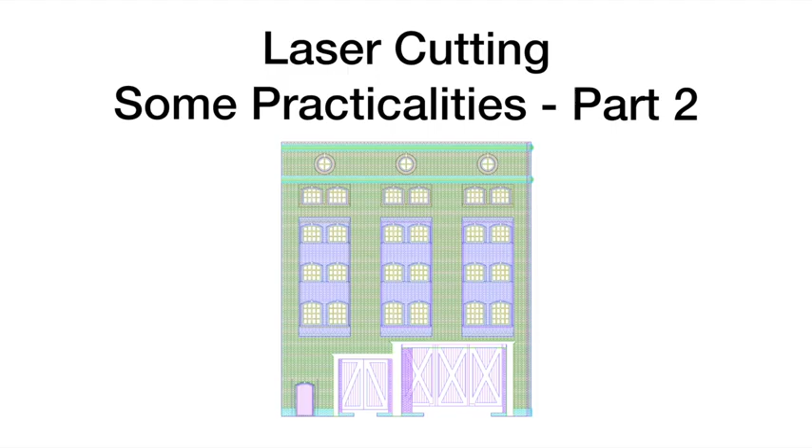Welcome to part 2 of this brief overview of some of the practicalities of designing for and using a laser cutter. We left part 1 having designed our particular object in carefully planned layers. We will now pull much of that apart as we get the object ready for the laser cutter.

We could, of course, simply show only the layers from a single sheet and export that to the laser cutter and cut it as it was drawn. But this would be enormously wasteful of material and, as we have seen, not an inexpensive material. But in addition, the layers we carefully plan for the design of the object are not necessarily suitable for the cutting process itself, as we shall see.

In practice, we'll tear up the drawing, well, actually copying and pasting to a new set of files. I can guarantee you'll need to go back to the original at some point, to create a file for each thickness we have used. Do this by showing only the layers pertinent to a particular sheet, hide the rest, then copy and paste this, including any etch layers, to the new drawing. Repeat for any other layers referring to sheets of a similar thickness.

At this stage, don't worry about the layout in the new drawing, just ensure they don't overlap. You lose nothing by having them well spaced out, and it makes the next step easier. You do not need to copy any construction or annotation layers. This does highlight one useful tip, which I'm sorry to say I don't always do, and that is to use the thickness of the material in the name of the layer. One thing I do always do, however, is include the thickness of the material in the file name. If you are cutting several sizes in one go, this can be very helpful.

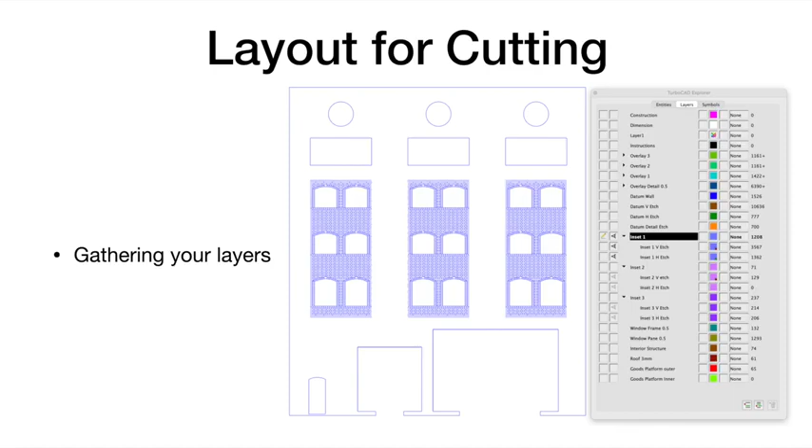The key dimension here is the maximum size of the laser bed. That is the maximum size sheet that the laser cutter can cut. Clearly, this is a restriction you have to work within, and its influence will vary depending upon the scale you are working in. The club laser I use has a bed approximately 450 by 350 millimeters, big enough for most things in 4mm, no problem in 2mm I would imagine, but you may need to make buildings in sections in 7mm.

Setting the size of the grid, as we saw earlier, to this size gives a very simple visual indication of how your design will fit on a sheet of material, and if you need more than one sheet. If your software does not allow setting the grid size, then add a rectangle on another layer and use that. Just remember to hide it before you export the drawing. There are, however, a number of other issues that you will need to consider in laying out the drawing for cutting. The first I'll look at is tabs.

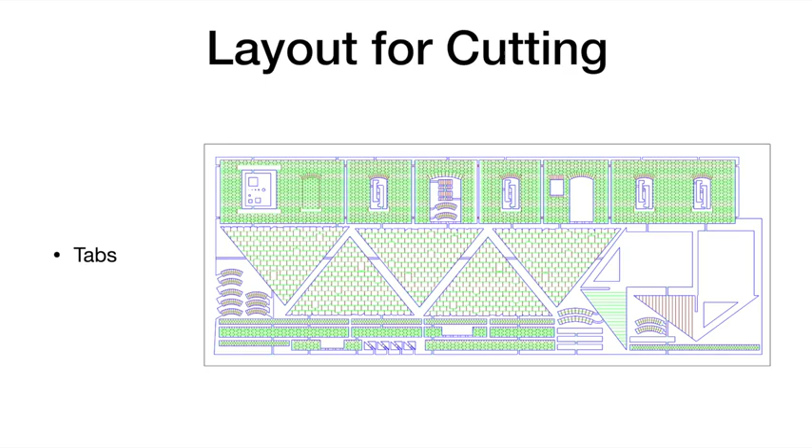To have tabs or not to have tabs is certainly a question. To state the obvious, tabs are there to keep the final output together, as you can see in this drawing. I see 3 reasons. One is to keep the cut parts together once they are finished, which is nice but not essential in itself. And the second and third are to avoid problems whilst cutting and are far more important. Your laser cutter will sit on a grid. The club laser I used is a simple vertical grid, but others might have a honeycomb or square grid.

Small parts can fall through and, whilst this is not disastrous as they can be retrieved from the offcut tray below, can be tedious. The bigger problem, however, is that they might half fall through. They tilt across a grid bar, but do not fall through. This can be disastrous as the piece sticking up can catch the laser head as it moves around, which will move the material and ruin the job.

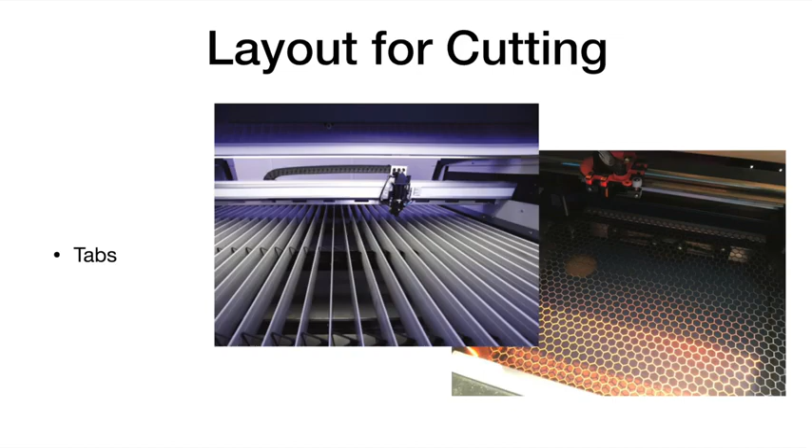So, if your part is large enough to cross more than one bar of the grid, it can probably be left untabbed, unless it's an unusual shape. But otherwise, you need tabs to hold the parts level. Tabs need not be big. I typically use 0.5 millimeter and also put etch lines across where the tab joins the part you want. This makes it easier to separate and clean up afterwards.

I said there was a third reason for tabs. This is more complex, and it's not just about tabs, but they are part of the solution. It's about keeping the parts in place whilst the laser is cutting. The laser will cut the layers in the order you dictate. You should always do the etch layers before any cutting layers.

But within any layer, the laser cutter will cut in an apparently random fashion. It's obviously not, and it appears it's probably the order the objects were originally drawn in. But for some things, you need to keep a tighter control on where the laser cuts and in what order. I'll highlight windows and long thin cuts.

These are for the windows and allow me to force the laser not to spend too much time in one place. Typically, I draw my glazing bars 0.6 mm, allowing for the 0.2 mm that is lost to the width of the laser. This gives, in 4 mm, a scale 1.2 inch glazing bar, which seems fine. If the laser does all the cuts at the same corner, one after the other, the narrow material can buckle with the heat. The separate horizontal and vertical cut layers for the windows help avoid this.

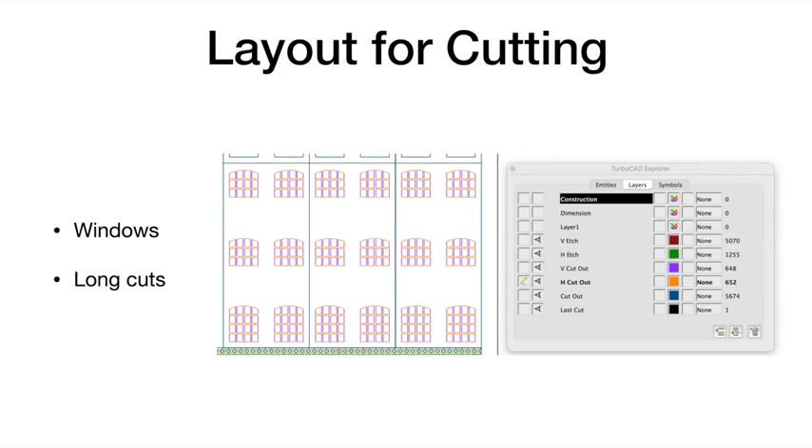Long cuts on narrow objects can also cause problems, particularly on thinner materials. Given that some heat is always generated, you can probably see that these long strips have a tendency to buckle slightly as the cut is made. To minimize any risk from this, I manage the order the cuts are made in. As always, the etch layer should be done first.

Then I cut any mortar return holes, place them in their own layer to allow this to happen. It's probably worthwhile doing this in the design layout in the first place. It saves a lot of hassle later. I know this because, well, let's move on.

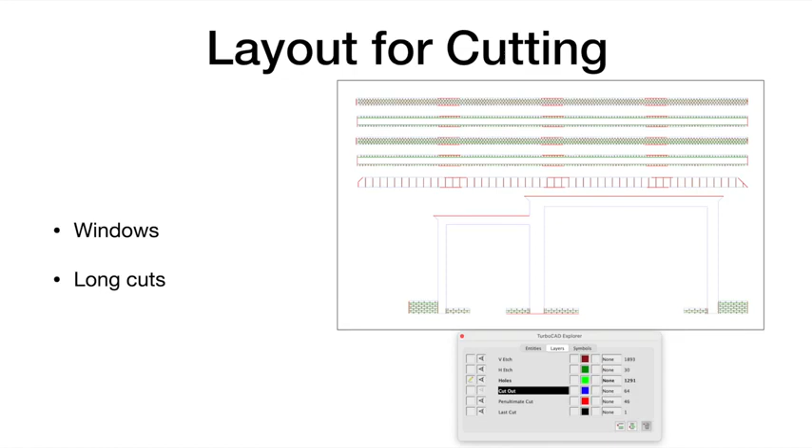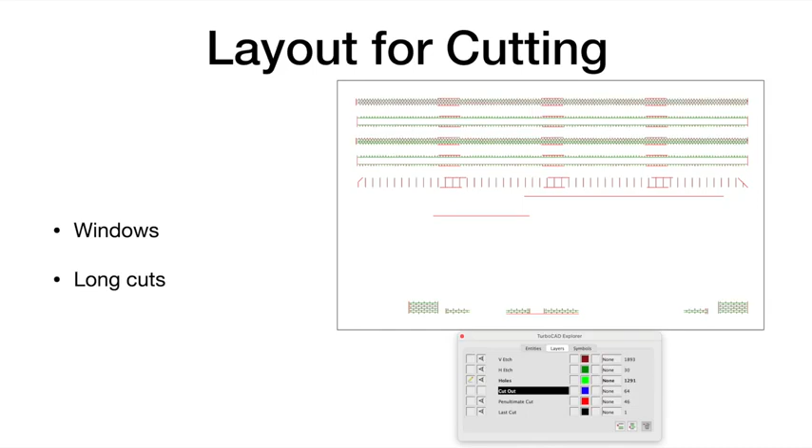I have a layer that cuts out most of the strips but leaves some large temporary tabs. In some cases, you may want to make some normal tabs as well. I've removed the normal cuts and you can more easily see the red lines which are my temporary tabs. You'll notice that the ends all fall into this layer as well as some along the length. Precise sizes aren't important, just enough to hold things in place.

The last thing to mention here is what I usually call the last cut. Just for a change, this is from an underframe for a converter or transporter wagon to take standard gauge trucks on a narrow gauge wagon. And I realise that the picture is the first attempt and the drawing is the revised version.

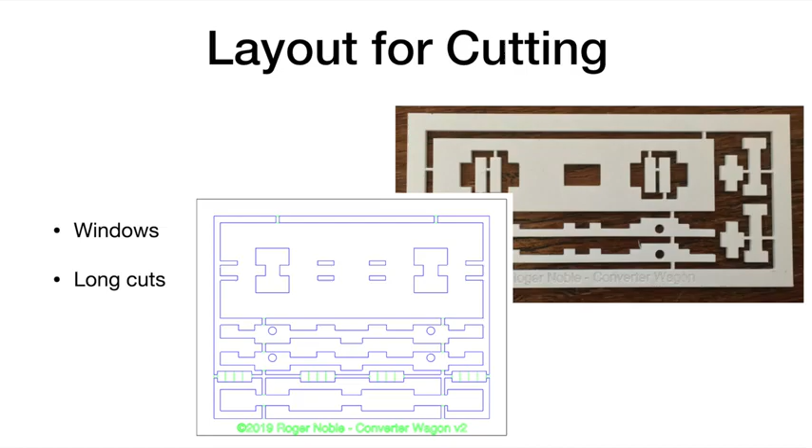You can see that the drawing has a black outline that provides the frame. If you're going to tab everything, then this makes sense. If not, then it's not always worthwhile, but it's a personal option. As an aside, text won't etch or cut unless you convert it into an object within your CAD program. Here's a summary of the key points.

Now we'll move on to look at how you take your laid out cutting design to the laser itself. You will need to export your design to a format that the laser cutter software can understand. There are two file formats it's likely to be: DWG and DXF. DWG is a proprietary AutoCAD file format, but it can be licensed by other CAD vendors.

DXF is also an AutoCAD developed standard, but its interface is published, so other vendors can develop interoperability with this standard. In my case, this is a DXF format. It's also worth noting that these both have new versions released on a very regular basis, so not all older software is compatible with the latest versions. You will have to experiment to find what works for you.

You would think that having drawn something in a colour, then it would be that colour, right? Well, not always. Objects you draw carry two colours: the colour of the object and the colour of the layer. Let's look back at the simple net we saw earlier. Green lines are horizontal etch, brown lines vertical etch, and the blue lines the cutout.

Unfortunately, some software, including both TurboCAD 2009 and the LaserCut software we use, default to using the object colour and assuming that all objects the same colour are in the same layer. If we turn the layer colours off, when we tell our laser software to etch the green and brown layers and cut the blue layer, we're going to get a very different object. The software can be set to take the layer as the key, but has to be told to do so. It's an easy problem to have.

Having got your file in the right format, you'll load it into the laser. But don't. Do a test piece first. Doesn't matter what it is, something small, but something that includes any key features, mortar returns, window panes, tab and slot joints, etc. It's well worth the effort.

You will now set up your laser software. Obviously they all vary, but I'll cover a couple of important points that are fairly generic. The first thing to notice is that this hasn't been corrected for layers, so if it was cut like this, you will get entirely the wrong result.

There are three things that govern how the laser cuts your material: power, speed, and number of passes. The more power and less speed, the more powerful the cut, and vice versa. You can see here that the top three layers are set to etch, the last layer set to cut. The speed and power combination tells you this. The number of passes is set to 1. This is something you might increase if your laser cutter is struggling to cut a particularly thick piece of material.

But they all say cut, I hear you say. Well, yes, but again, confusingly, an etch for the laser software is not the same as an etch that we've been discussing. Etches are, as far as we are concerned, simply laser cuts with less power and/or greater speed. The mode column can be set as etch, but an etch for the laser is to do with etching glass or metal and not something we are concerned with. Everything we do is a cut as far as the laser is concerned.

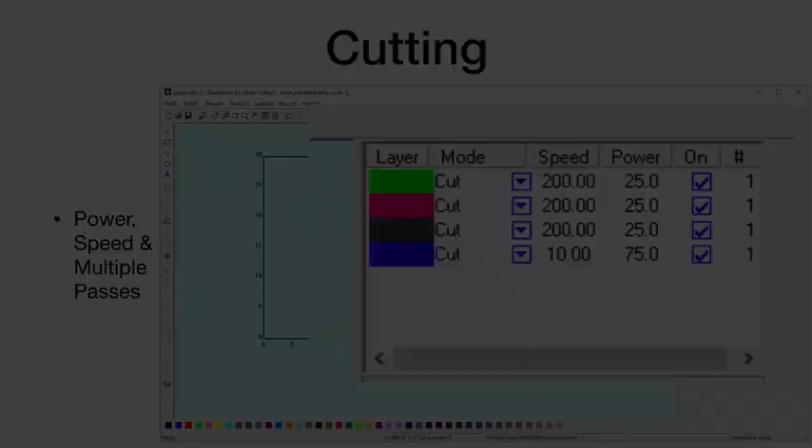I've never had to use more than one pass for a cut, but then our club laser is an LS3050, which is a £3,000 plus machine second hand, so pretty powerful. Typically the power setting versus the depth of cut is linear on a laser up to about 70%. Above that it starts to fall off as the extra heat melts or burns the material rather than cutting. And anyway, lasers have a current limit for continuous usage, and most recommend that you don't go above about 70 to 75%, as it surpasses this limit and also wears out the laser.

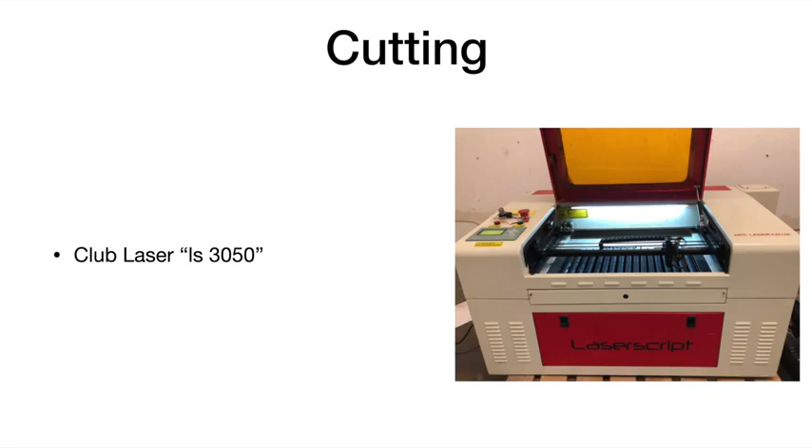You will need to adjust the laser head carefully to the correct height. Ironically, it's easy enough to cut some simple gauges with the laser cutter if needs be. Our laser also has a useful test feature that allows you to check that the cut you're about to make will fit on your piece of material.

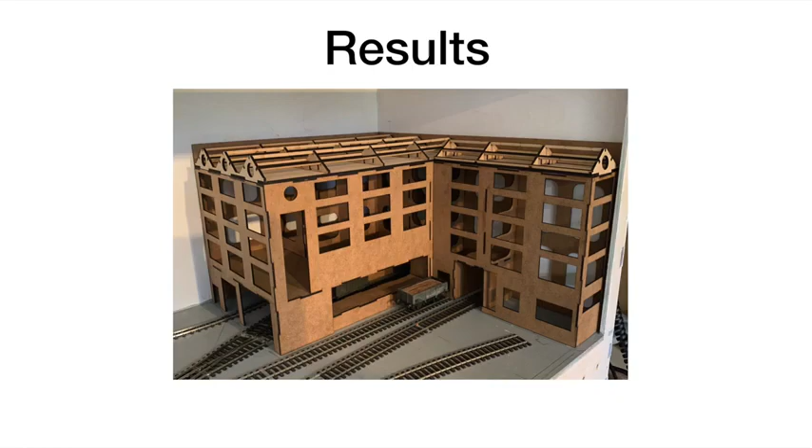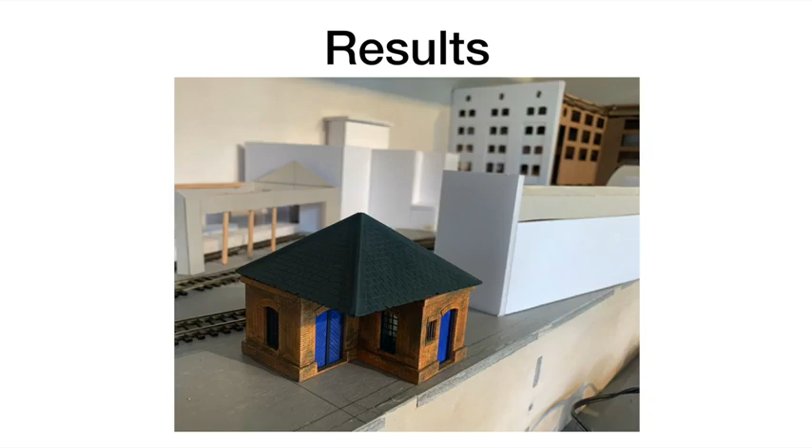And here's the gatehouse, not yet finished or actually stuck together, with the warehouse in the background and other mock-ups on the layout. I hope you found this presentation helpful. The hardest part is, unless you have previous CAD knowledge, getting around the CAD software itself. For the rest, it's straightforward enough once you know how, but there are several steps that are impenetrable without help, and it's those I've tried to address. Have a go. It doesn't all have to be railway related.